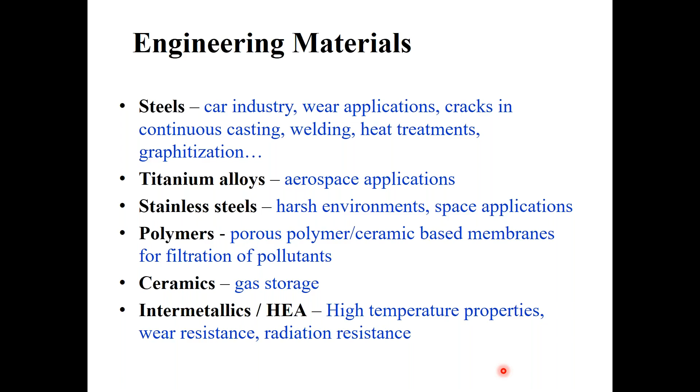So this is an overview of the research at our subject. Our approach is that we want to identify the ways to enhance the properties. We design and tailor the microstructure, mesostructure, nanostructure, and also we tailor the local atomic arrangements to enhance the properties. We develop infrastructures and also develop new and novel characterization methods.

The areas where we are strong in research are additive manufacturing, steels, ceramics, porous ceramics, metal and intermetallic matrix composites. The new areas that we are exploring more and more are high entropy materials, 3D printing of different materials, lightweight alloys, intermetallics, steels, surface design of materials, and shaping of materials for optimum design.

If we look at our group, we are 4 seniors in the group. We have 2 research engineers, 5 postdoctoral researchers, 11 PhD students, and roughly around 12 master students working on their thesis in engineering materials.

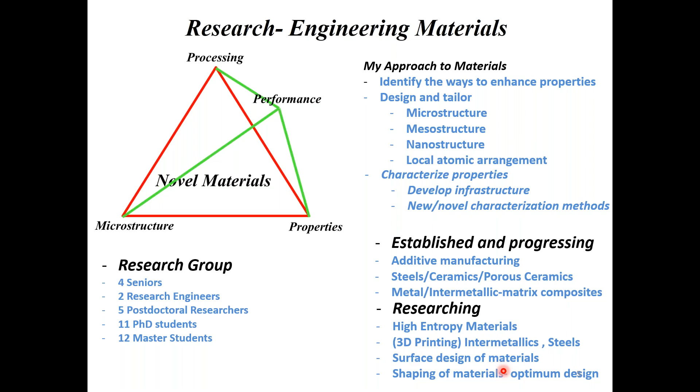As you said, we had developed the TMTEST infrastructure, that is a thermo-mechanical and tribological infrastructure. The idea was to establish infrastructure where we can determine the properties of the materials and design materials for high temperature applications and materials for harsh environments applications.

So for today, we have this structure for our seminar. First I will talk about microstructure tailored stainless steels with high mechanical performance at room temperature, intermediate and elevated temperature. After me, Rosa Maria will present a study of crack susceptibility of microalloyed steels during continuous casting. And then the last will be Farnoosh, who will talk about implementation of quenching and partitioning methodology in different industrial processes.

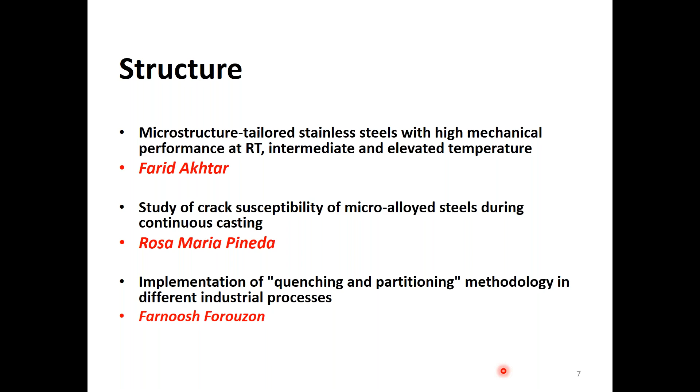For the first part, I will introduce additive manufacturing and selective laser melting, the method we use to sinter duplex steels and martensitic stainless steels. Then I will discuss the microstructure hierarchies and heterogeneities in SLM fabricated stainless steels, and go through the experiments we conducted at room temperature and high temperature in Gleeble, determining properties at low, intermediate, and high temperatures.

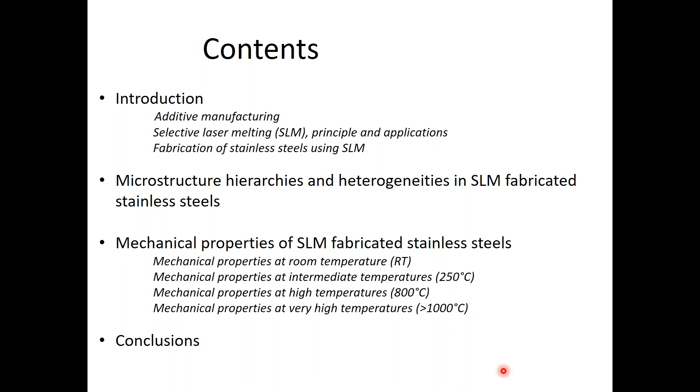As an introduction, AM is a process of building 3D objects from CAD/CAM files layer by layer. There are different types of AM: solid based, liquid based, powder based. We will work on powder based AM, and I will present selective laser melting and compare it in some cases with electron beam melting.

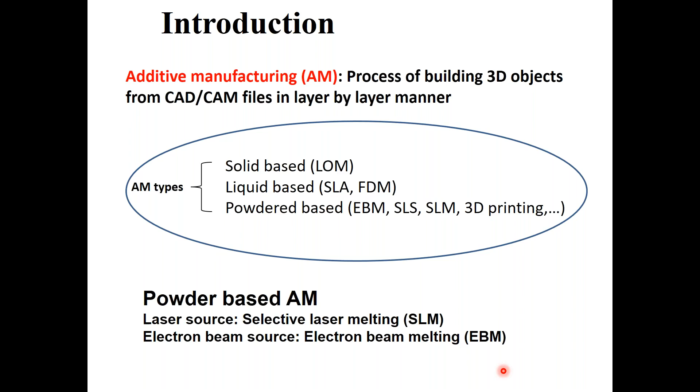Selective laser melting is a rapid prototyping technique that fuses and solidifies powder materials with the aid of a focused laser beam, as you can see in the figure, where we have a powder bed, and we build the component by scanning the laser layer by layer and consolidating the materials.

There are certain advantages associated with this technique, like production of complex shapes. It's very fast heat transfer, so we can get interesting microstructures. We can produce functionally graded materials, and we can design and tailor the microstructure and properties. Some disadvantages of SLM are high residual and internal stresses, low build volume, optimization is a challenge, and the equipment is expensive.

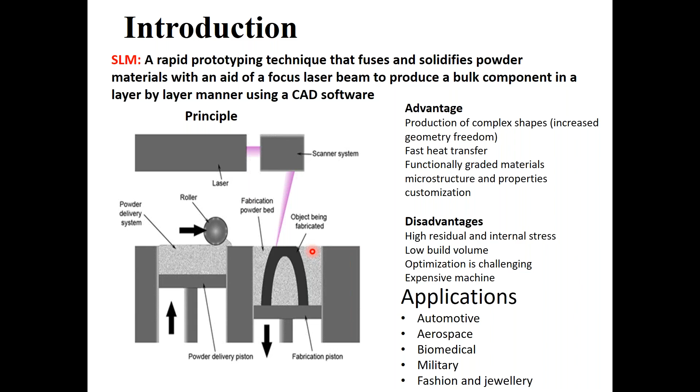We have a lot of applications in automotive, aerospace, biomedical, military, fashion, and jewelry.

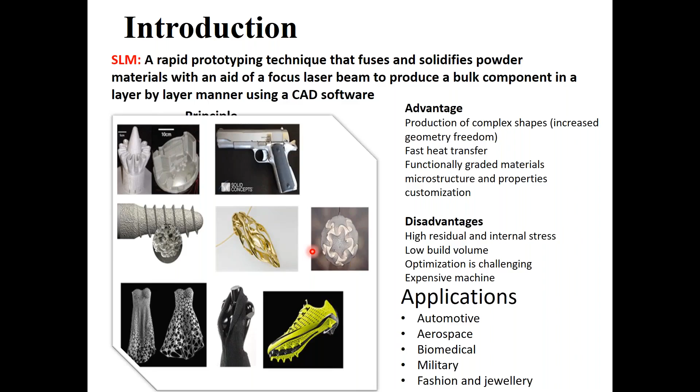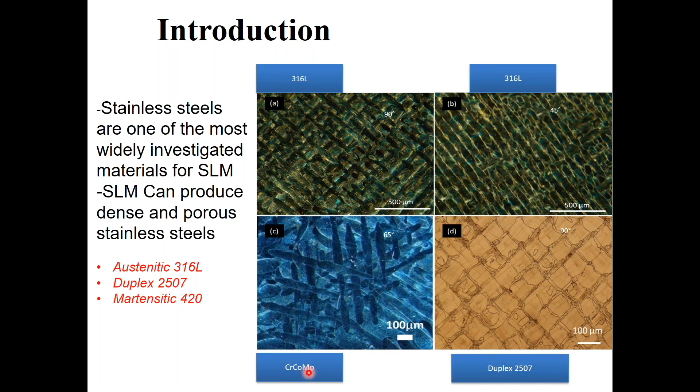I will go a little bit deeper into this microstructure, and here you can see a scan. If we go further within this scan, we see bigger grains. And if we go further into these large grains, we see subgrains of very small size, around 500 nanometers.

So it is a hierarchical microstructure which has laser scans, then grains, and then subgrains. Here is the microstructure of martensitic 420 SLM, and you can see a similar kind of hierarchical microstructure obtained. You can also see the martensite needles there in the SLM built sample.

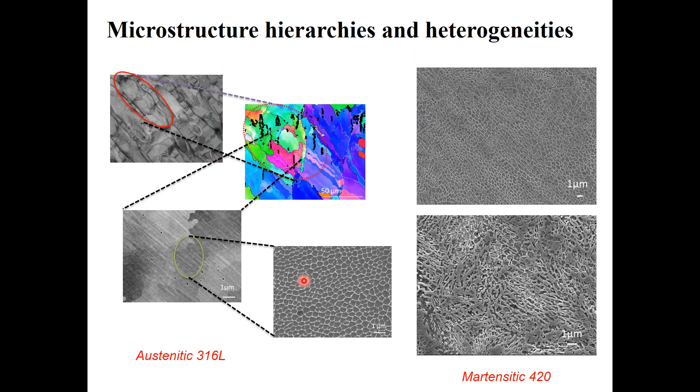So it is a hierarchical structure. If we look closely, we have bigger grains and subgrains inside. The subgrains can also be of different sizes in adjacent grains. Within these subgrains, if we look at the grain boundaries, we can find segregation of certain elements and also some oxides. So it's a hierarchical and heterogeneous microstructure, which opens up the possibilities to achieve properties that we cannot get in a conventional cast or produced steel.

Now I will discuss the mechanical properties of these SLM 316 steels at room temperature. This is an as-built sample, tested in a tensile test. In this case, we can get a yield strength of 240 to 300 megapascal, tensile strength of 500 to 650 megapascal, and elongation of 40 to 45%.

This is the typical property of austenitic stainless steel, with a hardness of 140 to 180. If we compare these properties with SLM built material, which has a hierarchical and heterogeneous microstructure, we see better yield strength, higher tensile strength, similar elongation, and higher hardness. So we can get a clue that this hierarchical microstructure, despite the same chemical composition, is contributing towards superior mechanical properties at room temperature.

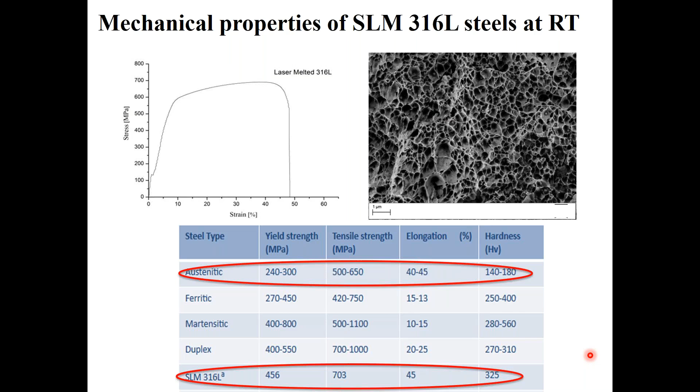This is the characteristic microstructure, and after deformation we can actually look through the microscope at how this material is deformed, how the substructure dislocation loops are produced, and how these oxides are contributing towards the high mechanical strength of this material.

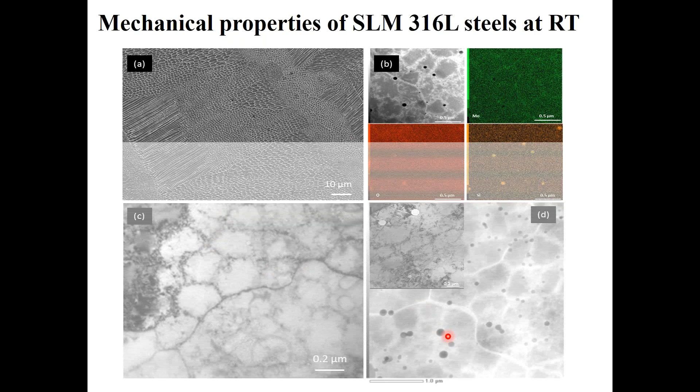This is the second duplex steel, 2507, and this is the as-built sample. Interestingly, after SLM it is only ferritic instead of duplex. As produced, we get a tensile strength of 1321 megapascal, yield strength of 1214, and hardness of 450, which is comparatively very high to duplex stainless steel and also ferritic stainless steel.

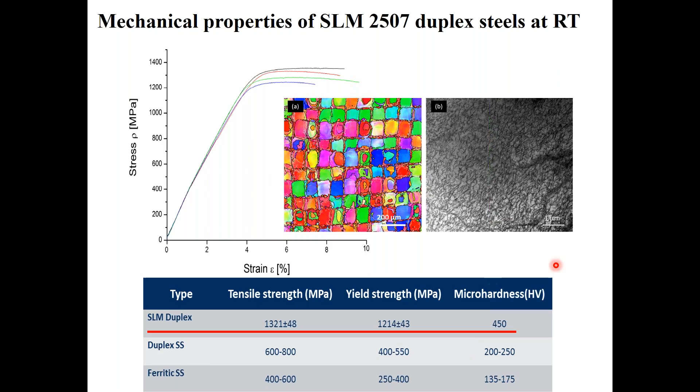Since it's only ferritic, we try to do the heat treatment to get the duplex structure. After the heat treatment, we found out that the mechanical properties reduced, the mechanical strength reduced to 920, and the elongation reduced drastically to only 1.8%.

So we looked in the microstructure and tried to understand why this happens. We found out that although there is a phase transformation from ferrite to austenite, giving the duplex structure, at the same time we precipitate intermetallic phases like sigma and chi phases. That is responsible for the low elongation in these states.

So for room temperature application, with such a heat-treated structure, we don't get promising properties. But we will see that these precipitates actually contribute towards high temperature mechanical stability in the steels, which I will show later.

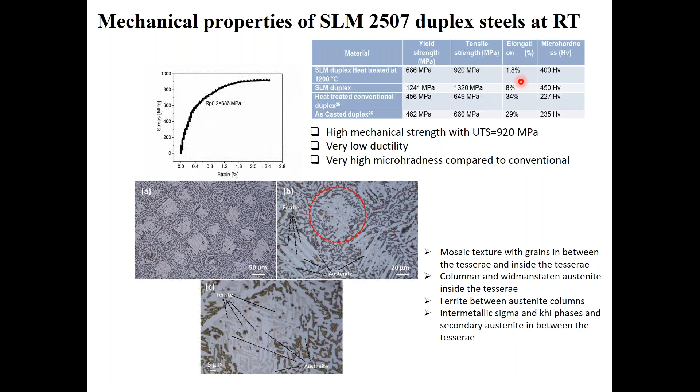This is the third steel that we built, the mechanical properties of SLM420, that is a martensitic steel. You can see the SLM structure, a hierarchical structure, gives us very promising properties, 1800 megapascal strength. If we compare it with the annealed cold drawn 420, that has 800 megapascal tensile strength.

Elongation is slightly low, but it is comparable with the annealed sample.

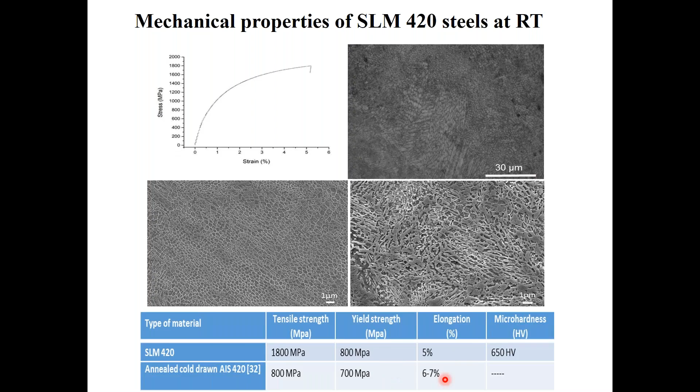Now I will show you if we increase the temperature from room temperature to 250 degrees centigrade, how this hierarchical structure contributes towards the high temperature mechanical stability.

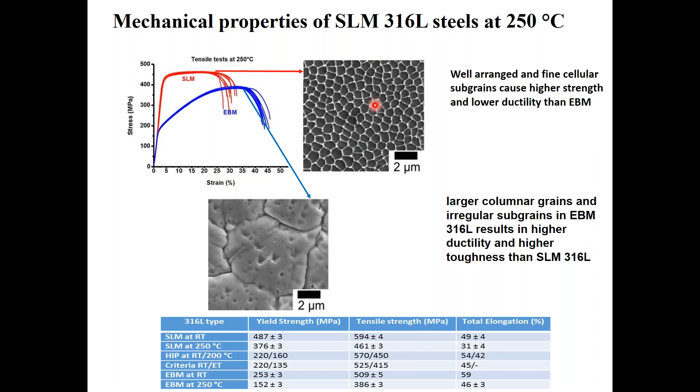Then we did the mechanical test at 800 degrees centigrade, which is quite high temperature for steels, and we observe stress relieving, grain recrystallization, and grain growth in conventional steels.

Whereas in this case, there's a lot of strain hardening happening, and we are getting very high mechanical strength of 400 megapascal. The microstructure shows that the hierarchical structure is not changed or modified even at 800 degrees centigrade.

So this suggests that this heterogeneous microstructure is contributing, even at 800 degrees centigrade, towards the mechanical stability of the steel.

Then we started thinking, how stable is this microstructure? First, this hierarchical microstructure is developed, the subgrains are formed due to the segregation of certain alloying elements at the grain boundaries, so they make cells.

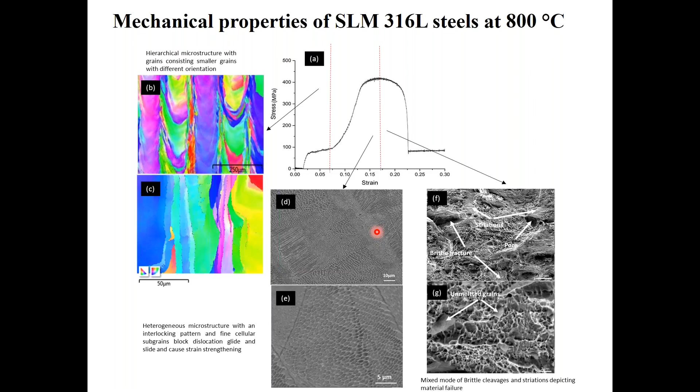To break down those cells, we need to diffuse those alloying elements from the grain boundaries or subgrain boundaries. So we started heat treating them at different temperatures for different times to understand why and how long this microstructure is stable. We heat treated at 1100 and 1200 degrees centigrade and investigated the mechanical properties as well.

We have proposed the mechanism that these subgrains, when heated up to 1100, start merging together above 1000 degrees centigrade, and at 1100 it becomes obvious. At 1200 degrees centigrade, we cannot see any subgrain microstructure there.

So it requires quite high temperature to change or destroy the microstructure that we get in as-built SLM 316 stainless steels. Based on this mechanism, we can understand that if the grains are not coarsening, the structure is very stable, leading to superior properties of these steels at high temperature.

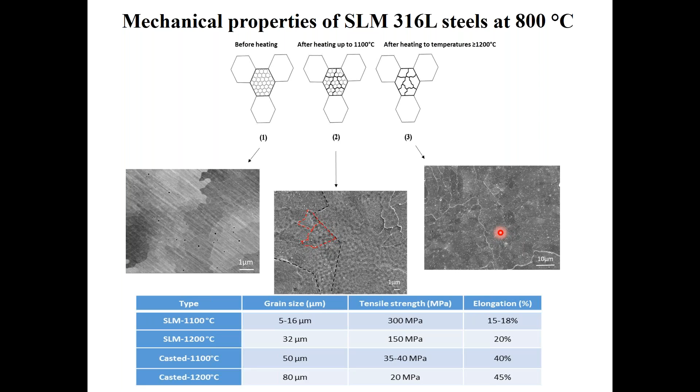Then the mechanical properties of SLM duplex stainless steel at 1200: at room temperature we got good strength. After heat treatment, we got sigma precipitates that led to poor elongation. But in this case, when we heat treated without sigma precipitates, we were able to get 200 megapascal with 30% elongation.

We achieved 200 megapascal with 30% elongation, and we didn't have sigma precipitates in that sample.

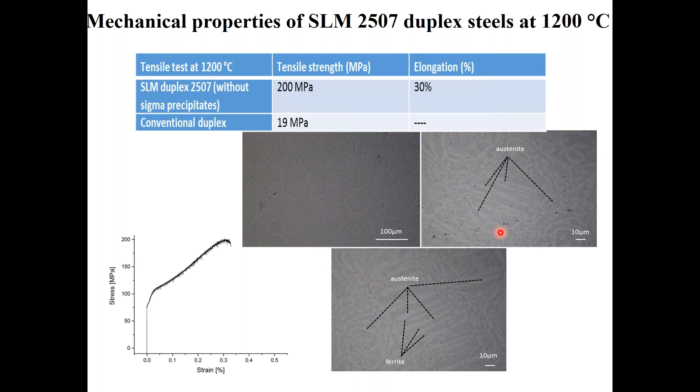Then we did the same heat treatment and tried to introduce sigma precipitates, and conducted the mechanical test. We found very interesting results: the sigma and chi precipitates actually contribute towards high temperature mechanical strength. We got almost double the mechanical strength, 400 megapascal with sigma precipitates, compared to 200 megapascal with no sigma precipitates.

We got 25% elongation, and the mode of failure was ductile. These are the XRD patterns of the two different samples, without sigma precipitates and with sigma precipitates.

So we were able to say that duplex stainless steel with sigma and chi phases in the microstructure, around 16 weight percent sigma content, can actually give better mechanical properties at high temperature, as high as 1200 degrees centigrade.

So then I will introduce the latest work that we are conducting here, which is producing high entropy alloys that can be possible candidates for high temperature applications in very harsh environments. For instance, this alloy: tungsten, tantalum, titanium, vanadium, and chromium. This is basically designed for plasma facing materials, and we want to investigate the stability of the structure and high temperature properties of these materials.

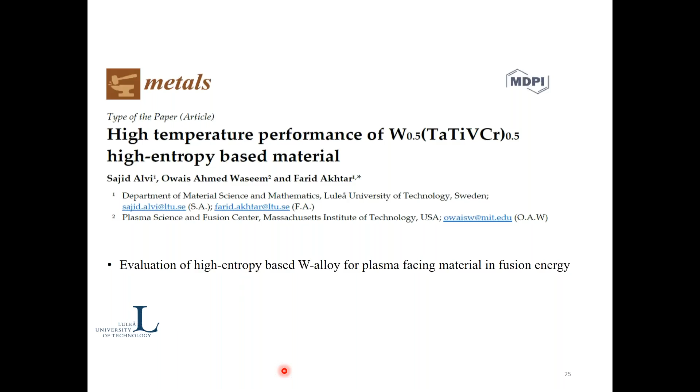They are designed on the base of the high entropy concept. So we did spark plasma sintering to consolidate these materials. They were consolidated, and you can see that when we have elemental powders, we get almost signal from the alloying elements like tungsten, titanium, tantalum, vanadium, and chromium. After consolidation, we get a single solid solution, meaning we have made up an alloy of this high entropy alloy.

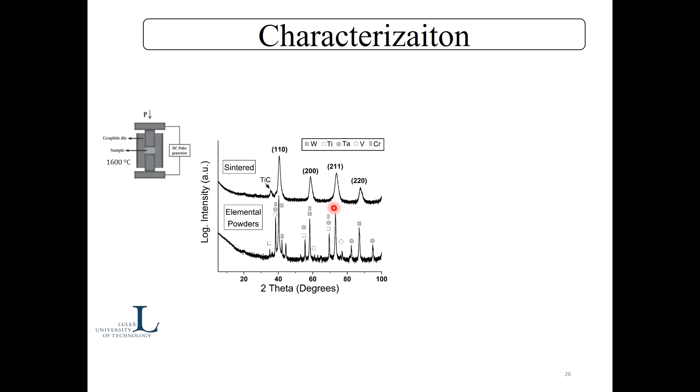And this is the microstructure, and you can see it has a contrast, and we get some titanium carbide particles, but the rest is quite homogeneous. You can see the elements like tungsten, tantalum, chromium, vanadium, and titanium are homogeneously distributed in the solid solution.

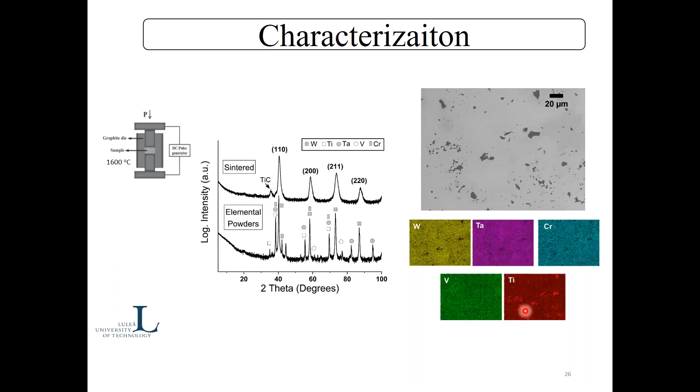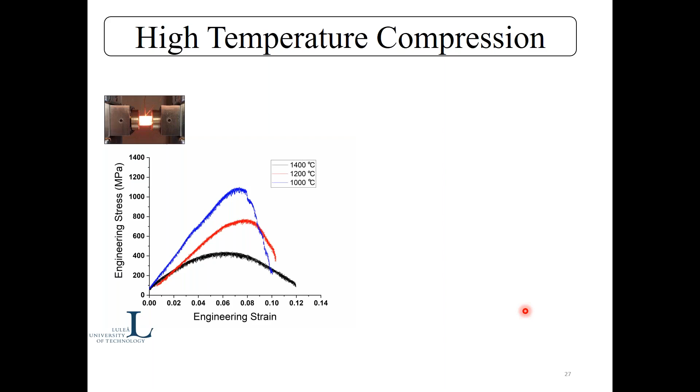Then to investigate again the high temperature properties, we started at 1000 degrees centigrade, then 1200 and 1400 degrees centigrade. We performed this test and got very, very good mechanical properties for this material, meaning it can be used for very high demanding applications up to 1400 degrees centigrade. So these are the fracture surfaces we got. Different mechanisms were operative at 1000, 1200, and 1400 degrees centigrade.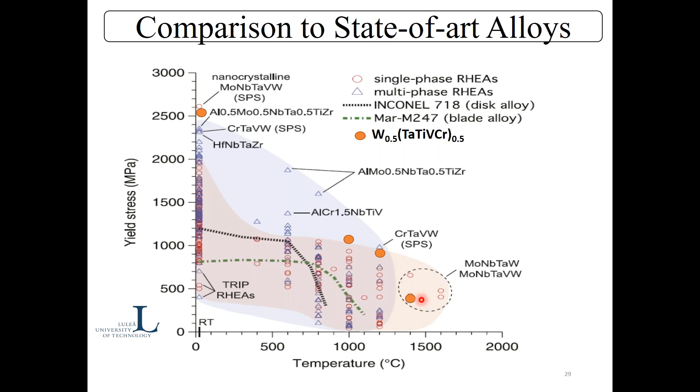So this way we can design materials and investigate, tailor their microstructure, and investigate their high temperature mechanical properties and thermal stability, and also use the heat treatment process to tailor the microstructure and properties. These are the articles we have published that you can read to get more information if you are interested.

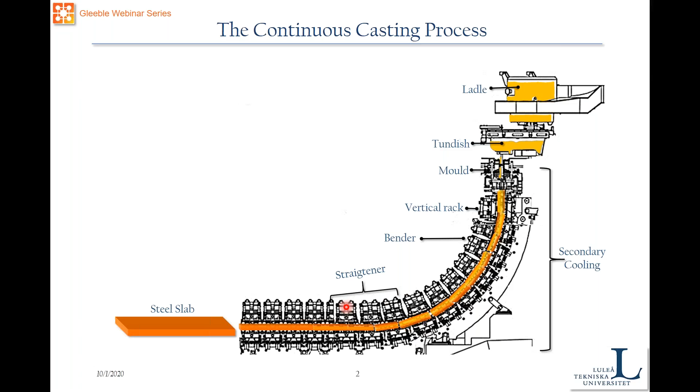One of the critical issues during continuous casting, especially for microalloy steels, in this case high-strength low-alloy steels, is the presence of transverse corner cracks. Transverse corner cracks are actually detrimental for the process because those affect directly the productivity, yield, energy, and of course have a great impact in economy.

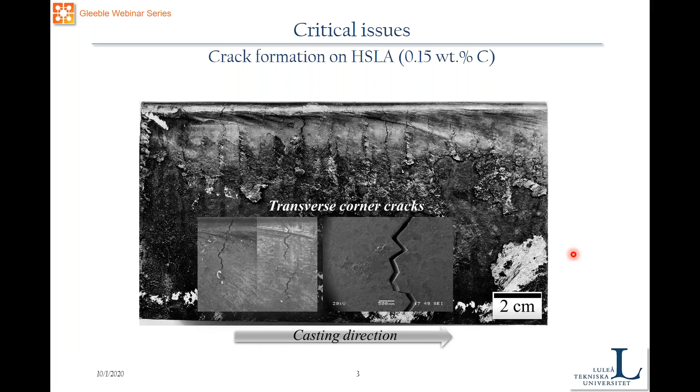Our main approach is to try to combine different features in this work in order to understand the formation of transverse corner cracks, starting from the chemical composition of the material. And we know that the chemical composition of any material is the key to understand the material's performance. So the chemical composition together with the process parameters will give us the important answers regarding the microstructure evolution, or the mechanisms, during crack formation.

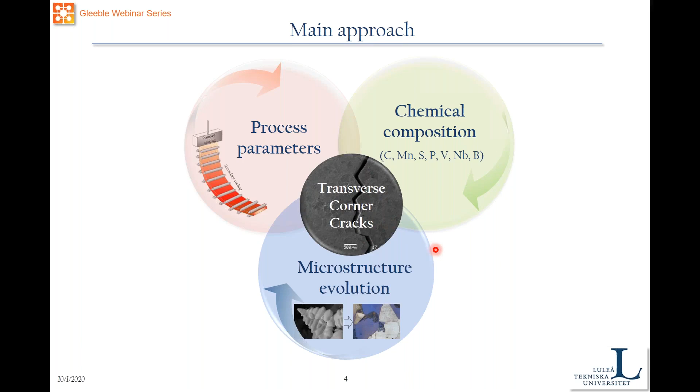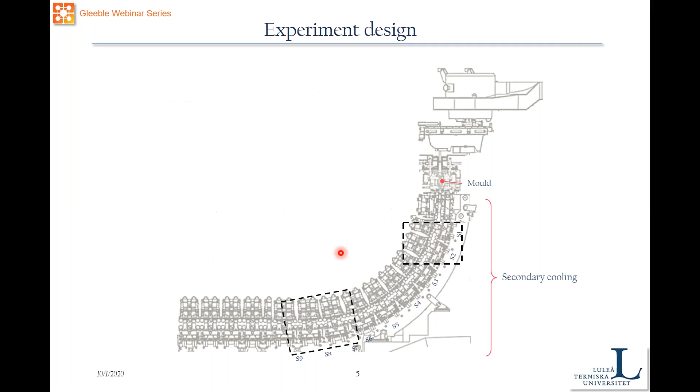So what we did here is we identified 2 main zones that might be risky for the cracking formation during continuous casting, which is the bender and the straightener. As its name says, it's like bending, it requires the deformation of the material. The temperatures here are oscillating around 1,200 degrees. So then here, the material is subjected to a combination of compressive and tensile stresses.

In the straightening, which is also considered a high risk section or zone during continuous casting, the material here is almost completely solidified. So the temperatures here are going down, and then it's also a combination of tensile stresses and compressive stresses, knowing that tensile stresses are needed for creating cracks in the material.

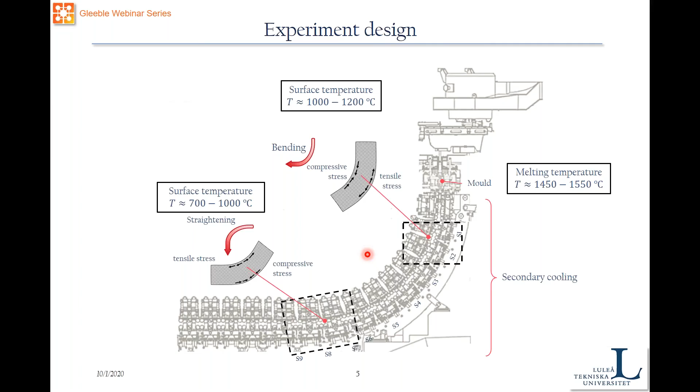So what we did, important to mention just before the experimental part: these temperatures that you can see here are the actual temperatures that were possible to measure by installing pyrometers in the caster. So then by taking these parameters together with the casting speed in the process, it was possible to simulate the process as close as possible to reality in solid state by the Gleeble system. We were using specimens with a diameter of 6 millimeters and gauge length of 12 millimeters.

The thermal cycles look like this. We were controlling the heating of the specimens at 20 degrees per second just before austenitization at 1300 degrees. We applied a holding time of 5 minutes. The idea for this was to ensure that not just the austenite could be homogeneous, but also to make all the precipitates dissolve, so those cannot affect the final results during the test.

So then in this case, we were performing this static tensile test at different temperatures, which covers more or less the temperatures that we saw previously. Tensile test was performed from 600 degrees up to 1000, with 100 degrees in between every temperature as a step. We were also applying 3 different strain rates, trying to simulate the effect of the casting speed, taking into account that the lowest strain rate here replicates the real casting speed applied in the real process.

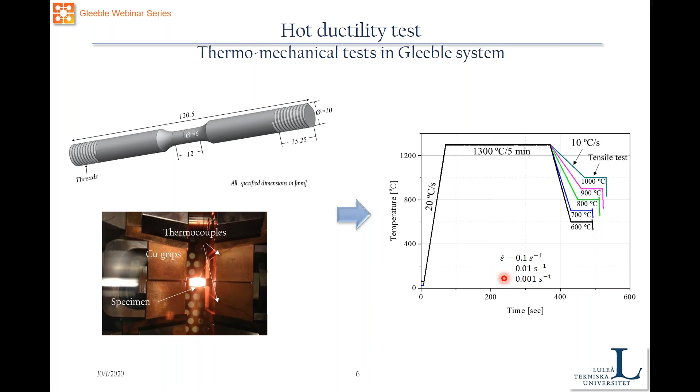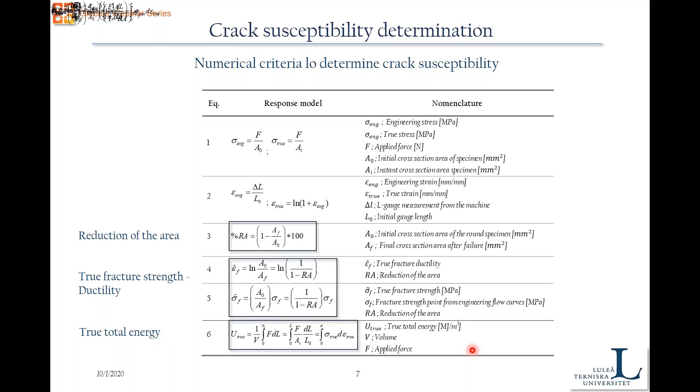The crack susceptibility results look like this. So then by comparing the reduction of the area method together with the true fracture strength ductility and the true total energy, we could obtain this type of results. Maybe this can be a bit confusing now, but I will help you highlight that there is a range of temperature that we can see something is happening in the material. So starting from the reduction of the area, there is a point that the material is really, we can see that it's changing, the ductility is dropping.

So what we can see here is that the true fracture strength is based on the reduction of the area as well, but it takes into consideration the true stress and true strain at the fracture point. We can also see how the material is reducing in ductility, and the same trend in the true total energy.

So we can say that the lower the strain rate, the lower the ductility. The effect of strain rate plays an important role here. The crack susceptibility can be said to be between 700 and 800 degrees, and less susceptible at 900, 1000 degrees. What is happening here is mainly related to the recrystallization of the steel.

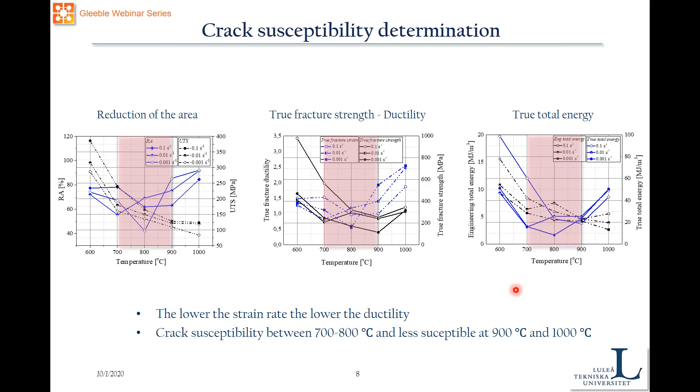The fractography and microstructural analysis showed important findings. We found a combination on the left side of ductile and brittle behavior in the material, and this was found to be an intergranular fracture. We believe the presence of inclusions is also affecting the behavior of the material, causing microvoid nucleation and coalescence of large inclusions.

On the right side, in the microstructural analysis, we saw a combination of different phases. We saw ferrite, and ferritic and pearlitic structure, but within the ferrite structures we found a combination of allotriomorphic ferrite, acicular ferrite, and Widmanstätten ferrite. Of course, it's quite difficult to see it here.

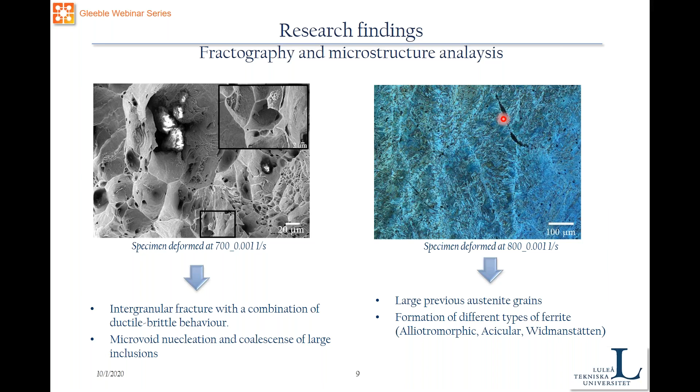According to the literature, Widmanstätten ferrite is considered detrimental. Widmanstätten ferrite is actually a phase that grows in parallel plates in a preferential direction within the previous austenite grain, or it can also grow from allotriomorphic ferrite.

It has been demonstrated that this results in cleavage cracks in the material. These plates act during dynamic deformation as a preferential site for crack formation to occur. So this phase was considered one of the reasons why the material is susceptible to cracking formation.

Further analysis was done using an open source script in MATLAB based on the Hall-Petch number, which could approximate the austenite grain size in non-homogeneous structures.

We measured the previous austenite grain size in the material and the volume weighted average grain size. I'm not going through this in detail of how I calculated it, but I will give you the link later in case you are interested in the methodology and numerical approach of this research.

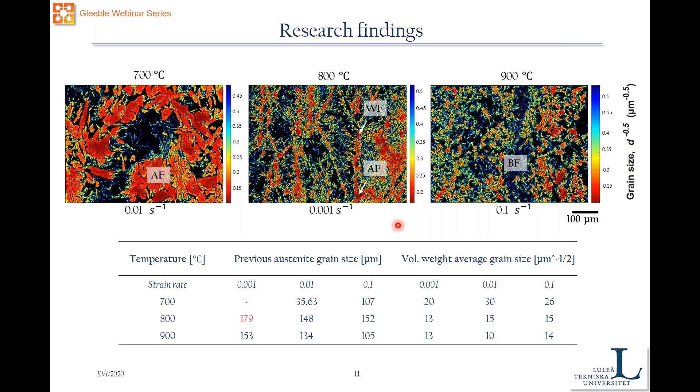It's also why I measured the previous austenite grain size, because previous studies have demonstrated that Widmanstätten ferrite can grow or be promoted if the previous austenite grain size is large, and it is promoted by deformation and by the grain size of austenite.

So what we concluded in this work is that these three criteria give us more or less where the material is susceptible to cracking formation, that is between 700 and 800 degrees, and less susceptible at 900 degrees. The effect of strain rate also plays an important role, as I mentioned before: the lower the strain rate, the lower the ductility. So if the company decides to increase the casting speed, it will be beneficial for the material as well.

The fracture of the steel occurs with a combination of ductile-brittle, quasi-cleavage, and intergranular fracture mechanisms. This can also be promoted by the formation of impurities, microvoids, or during plastic deformation.

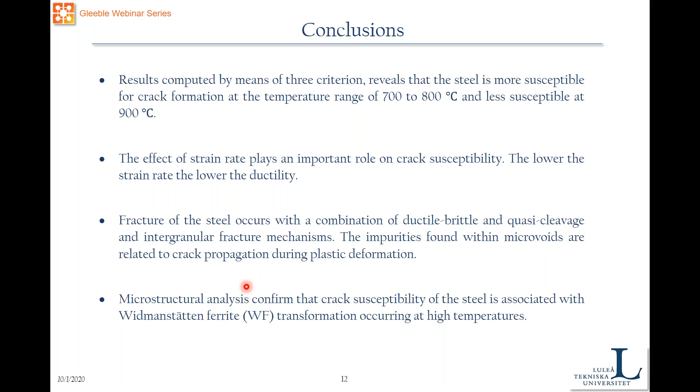Microstructural analysis also confirmed that the crack susceptibility of the steel is directly associated with the Widmanstätten ferrite transformation occurring at high temperatures. One of the conclusions that could help the company is that by avoiding this ductility range, or low ductility zone as I call it, it is possible to avoid the risk of formation of transverse cracks in the material.

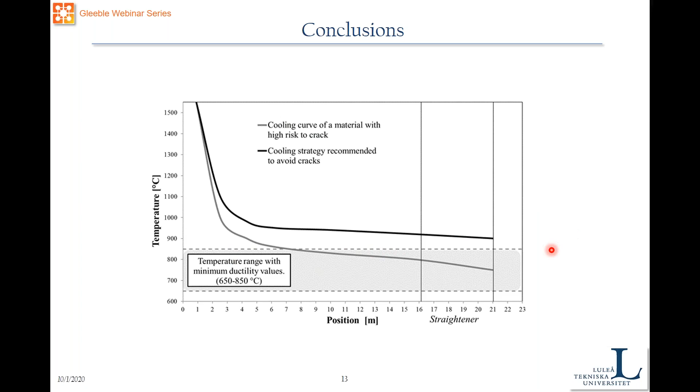The company also performed some plant trials, and it was possible to see that this could be beneficial for them. I will leave you a link here in case you are interested in reading this paper further. Thank you very much for your attention, and I will give the floor to my colleague, Fanush Rosa.

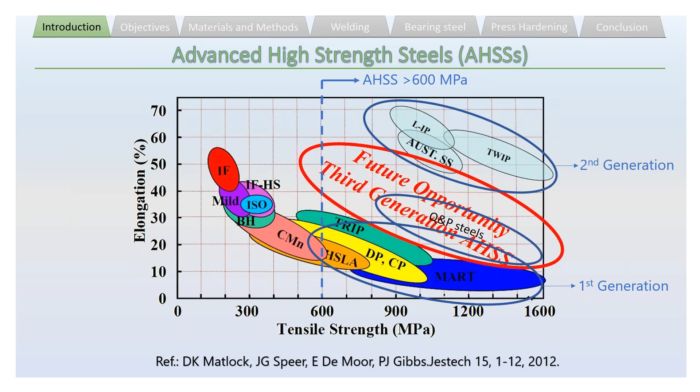So let me explain what is the quenching and partitioning process. We should first austenitize the sample fully or partially, and then quench the sample to a temperature below MS but still above MF. This means the sample will partially change to martensite, so the structure will be martensite and austenite after this stage.

Then in the second stage we have isothermal heating, which could be the same temperature as the quenching temperature or higher. During this partitioning stage, carbon will partition out of martensite into austenite. As a result, we have tempered martensite, which is not as brittle as before, and higher carbon content in austenite, which helps stabilize austenite at room temperature and gives us higher ductility.

Then at the end, the final stage is the final quenching, which could result in some fresh martensite in areas where we don't have enough carbon content.

Depending on chemical composition and the time and temperature of partitioning, it's possible we get other phases like bainite or other ferritic structures. Normally QP steels contain over 1.5 weight% silicon to inhibit carbide precipitation, because carbides consume carbon, lowering the chance to stabilize austenite.

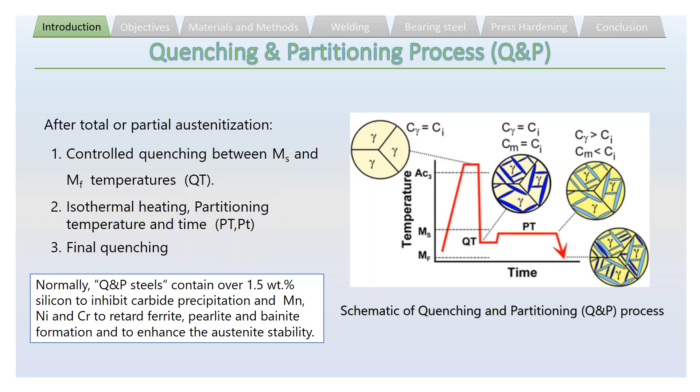If we look at the objectives of our work, we have three processes. The first one is welding—in this work, I worked on laser welding. You know laser welding has very high concentrated energy, meaning that after welding we get martensite because of the very high cooling rate.

And this martensite is not what we would like. So the idea of this work comes from quenching and partitioning: we controlled the temperature just after welding to a special quenching temperature between MS and MF, so we have some martensite, and after that we increase the temperature by heating the sample again, but for a very short time—depending on chemical composition, just a few seconds or maximum a few minutes.

So at the end, we have tempered the martensite formed during the first quenching, and we have some stabilized austenite. That's very interesting, because we normally need to do post-welding heat treatment after laser welding, and depending on chemical composition, it could take between 5 to 30 minutes.

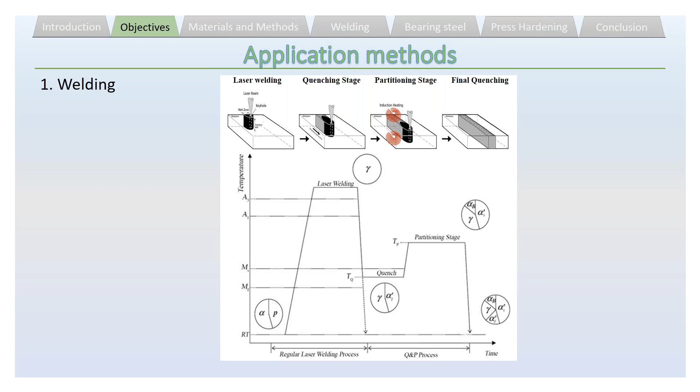The second application was bearing steels. You may know that bearing steels are usually high carbon content steels—they should be hard and usually martensitic. But we normally don't like high carbon martensite because, as you know, it's as brittle as glass. So the ductility of such structures is like 1%, for example in the bearing steel 100 chromium 6.

What they usually do for bearing steels in industry is quench first and then temper one or two times for one to two hours.

The other method to produce bearing steels, which is new, is austempering, which results in carbide-free bainitic steel. This kind of structure is really good—it could have very high toughness and very good strength at the same time. But the point is that it takes several hours, or we can say several days, so it's difficult to produce such structure because it's costly and time consuming.

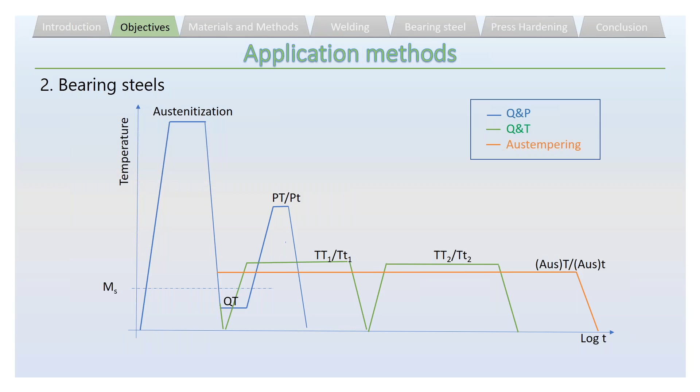And the last one is press hardening. As you can see in this picture... let's see... I'm just lazy.

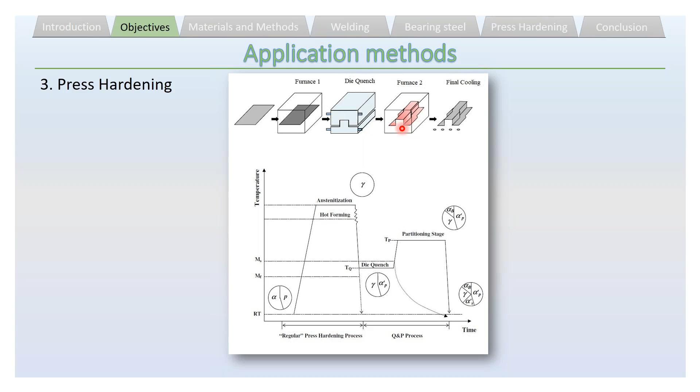But if we combine quenching and partitioning with hot stamping, you can see this: after hot forming, we can quench in a die quench set at a specific temperature we want as TQ, then take the sample out to a second furnace where we apply the higher temperature of partitioning, and then final cooling. The objective of all these is shortening the ordinary processing time, developing quenching and partitioning in service to industry, and designing the process by understanding the microstructural evolution.

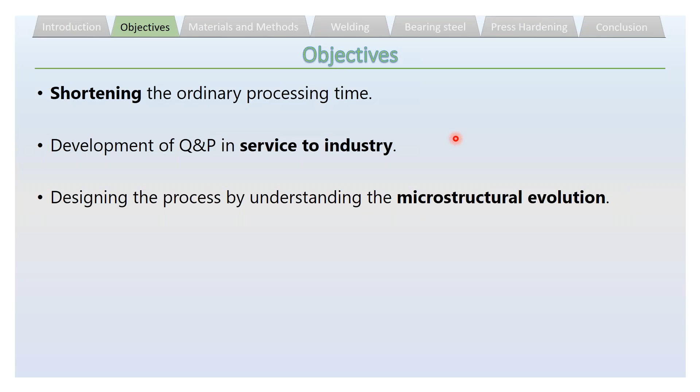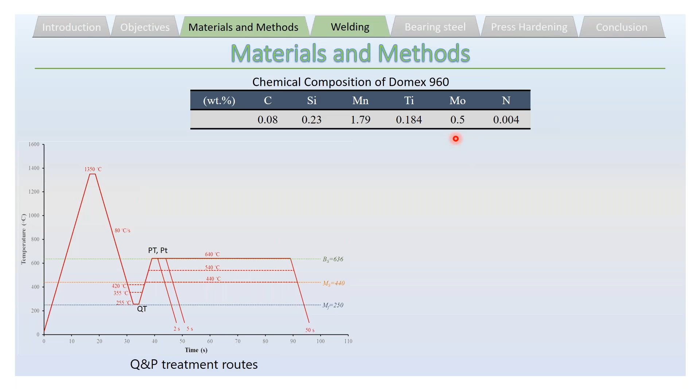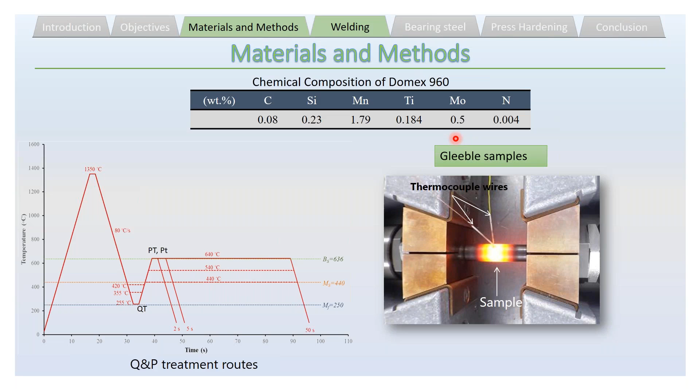Let's take a look at the results. In the first application of welding, we selected 3 quenching temperatures, 3 partitioning temperatures, and 3 partitioning times, so 27 different conditions. All samples were treated in Gleeble, and based on the microstructure and hardness results, we selected a few to test by real laser welding, using an induction heater to apply heat after quenching, in the partitioning stage.

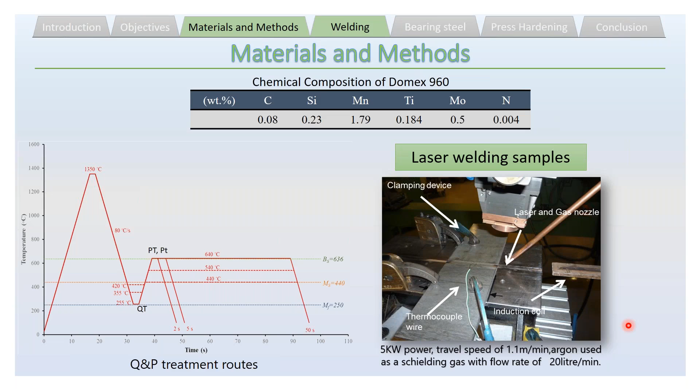During this time, 2 thermocouples were welded 1.5 millimeters from the fusion zone to control the temperature, because the most critical area for failure of the welds is the coarse grain heat affected zone. So we wanted to control that area and get the best results there.

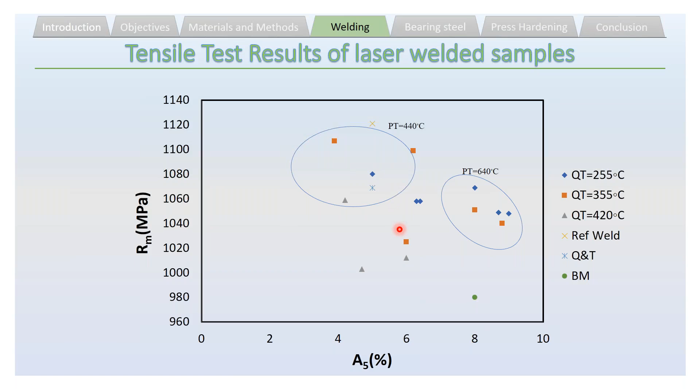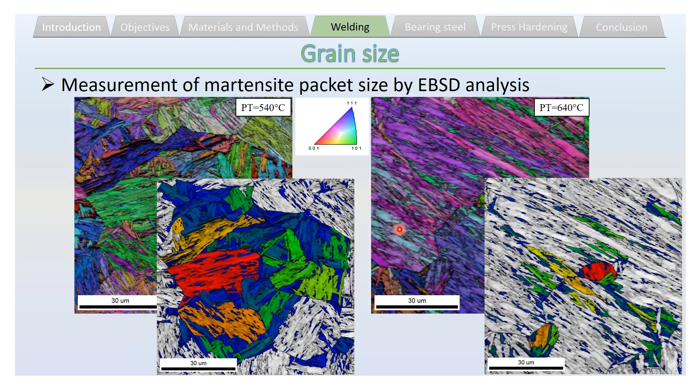But what was important was whether there was any grain growth. The structure is martensitic, so it's not possible to do normal grain measurement, so we needed to do EBSD and measure the packet size of martensite. What was very interesting was that at 640 we saw huge grains, approximately nine times bigger than what we saw at 540. These huge grains can decrease the toughness very much, so the best condition we found was at 540.

Currently I'm working on MIG-MAG welding with the same idea of quenching and partitioning. That work is much more complicated because we have filler metal, but in this case, with laser welding, we don't have filler metal, so it's a bit easier.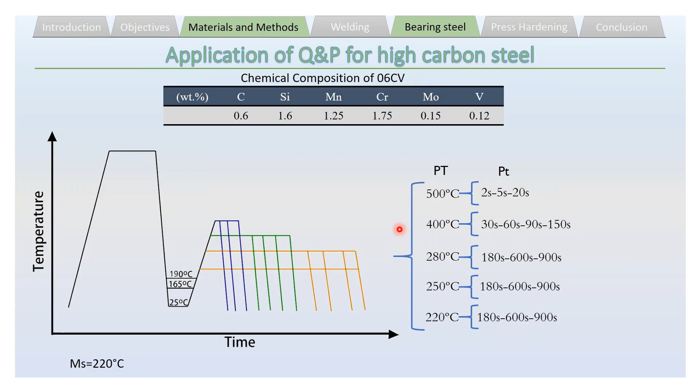The second application is about bearing steel. We used a quite high carbon steel, 0.6% with 1.6% silicon, and tested different conditions. We used both Gleeble and furnace plus salt baths to prepare the samples and compare the results.

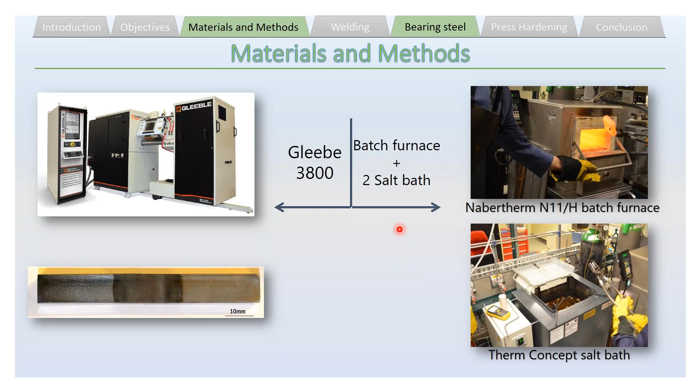We tested all the samples in Gleeble at room temperature. You can see what we have done: first the samples were heat treated in Gleeble, taking out the samples, polishing the critical area to avoid any rust or scratches, and then tensile testing.

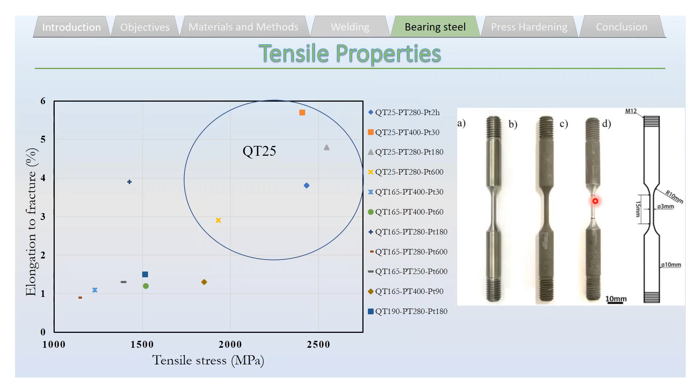We saw that samples quenched at 25 degrees C have over 2.4 gigapascal strength and 4 to 5% elongation, which is really good. The results of this can be found in 2 other papers. I invite you to take a look, especially at the first one.

You can find the control maps to design all different conditions, whether you want different strengths, ductility, or toughness - you can find everything in that paper. The last one, an ongoing project, is about hot stamping.

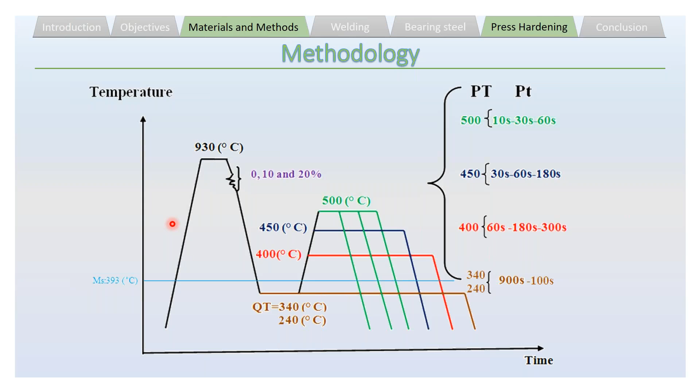We have used the settings used in Gestamp, a hot stamping company in Luleå, and we have good collaboration with them in this project. We used a very tiny sample first in Gleeble - the sample size is 4 mm in diameter and 6 mm in height, cut from a 6 mm sheet.

You can see the gas nozzles, which we used for cooling to a quenching temperature. This work had different difficulties using Gleeble, but thanks to the Gleeble staff, we figured out how to simulate the hot stamping process.

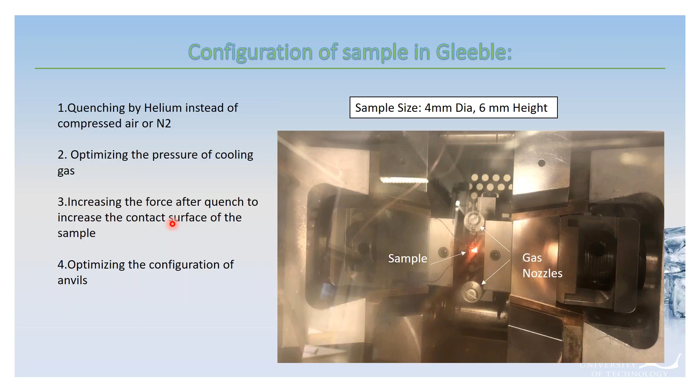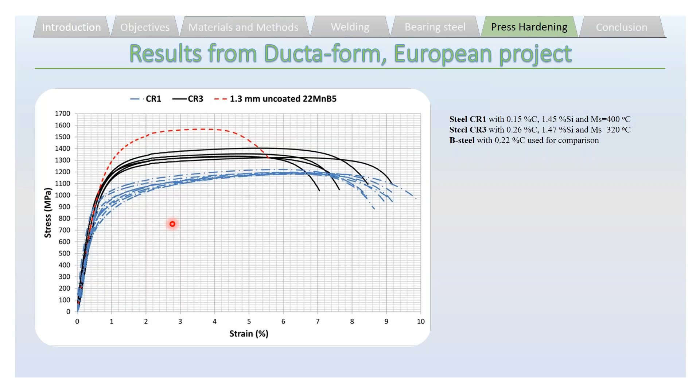The results of this project are not published yet, but this is from previous work by my supervisor Esa Vuorinen during a Ducta-form project a few years ago. It showed that quenching and partitioning could improve the ductility around 2 times compared to the boron steel which is used for this application. I would like to thank everybody for listening to this presentation, and give back to Farid.

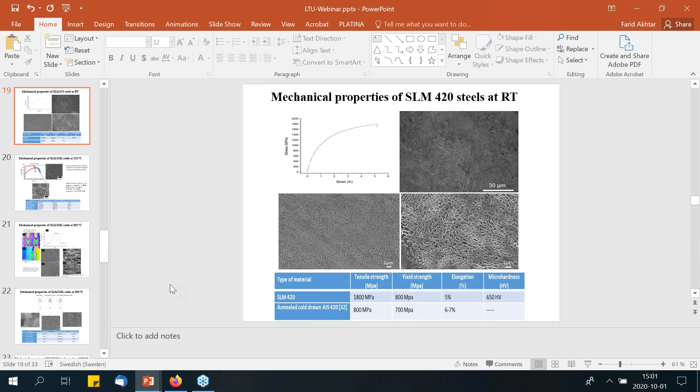Okay, and one of your slides, I don't know which one, I apologize — the question was, how does SLM produce the columnar structure in austenitic steels? I think there was a slide where you showed that columnar structure, and we're wondering how that occurred. The microstructure in SLM is actually cellular solidification that is happening, because it's very fast cooling as well. So it's not a very fast growth, but the columnar solidification is cellular solidification. That's why we're getting this kind of special microstructure in SLM steels.

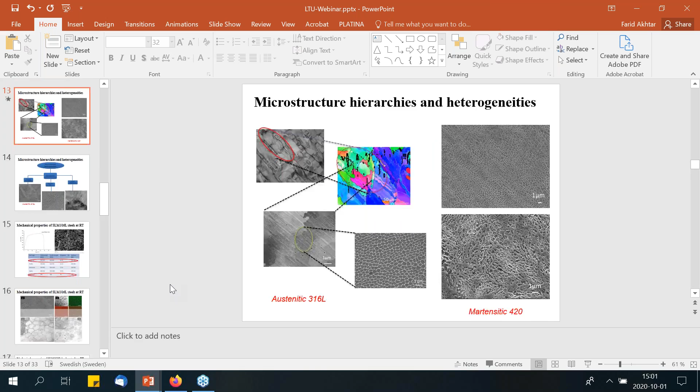Okay, maybe one more question, we're running out of time. The SLM 316 shows higher mechanical properties compared to conventional 316. Have you investigated the differences in fracture toughness properties? No, we didn't test the difference in fracture toughness. But it's a good idea actually to investigate the energy for fracture for both different microstructures.